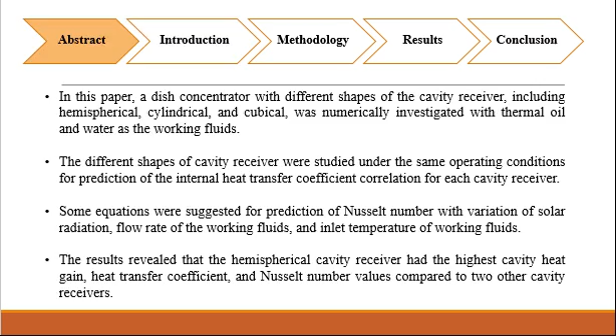Introduction. Some researchers investigated thermal models of solar dish concentrators with cavity receivers. Yan et al. investigated and optimized a new structure of dish concentrator. They presented equations for designing the novel dish structure with the highest performance. Soltani et al. investigated the optical and thermal performance of a dish concentrator with a new shape of cylindrical cavity receiver. They investigated different parameters for optimizing performance of the solar system.

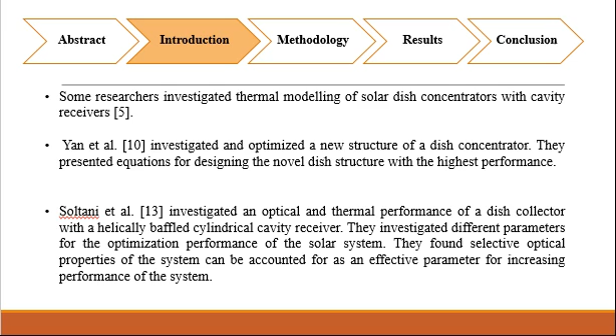They found selective optical properties of the system can be accounted for as an effective parameter for increasing performance of the system. On the other hand, some researchers studied convection heat transfer of the working fluid in solar systems. For example, some researchers studied convection heat transfer in microchannels based on laminar flows. Water and air were used as the working fluid. They presented some Nusselt number equations for the investigated system.

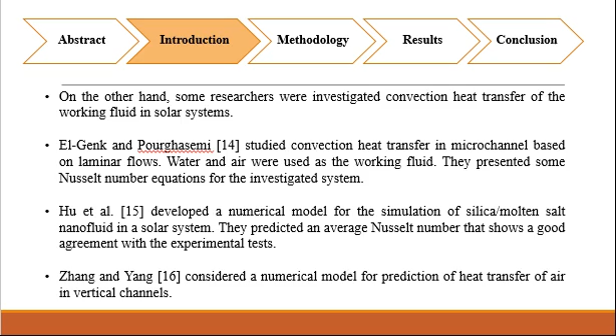Hu et al. developed a numerical model for the simulation of silica molten salt nanofluid in the solar system. They predicted an average Nusselt number that shows a good agreement with the experimental test. Zhang and Yang considered a numerical model for prediction of heat transfer of air in a vertical channel.

It could be seen from the literature review that there is no reported research related to the prediction of Nusselt number for different shapes of cavity receivers. Consequently, prediction of Nusselt number of the dish collector using different shapes of cavity receiver is a novel subject for research. In the current study, the influence of various parameters such as solar radiation, inlet temperature, and volume flow rate of the working fluid is investigated.

Three types of cavity receiver, including hemispherical, cubical, and cylindrical cavity receivers, are numerically simulated. Thermal oil and water are examined as the working fluid. The Nusselt number of different investigated shapes of cavity receiver using various working fluids is predicted based on the developed numerical model.

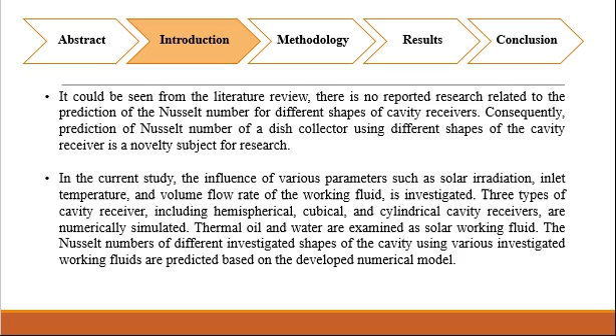Methodology. A schematic of the investigated solar system with different cavity receivers is presented in this figure. You can see here we have a dish collector with three shapes of cavity receiver, including cylindrical, cubical, and hemispherical cavity receivers.

The dish concentrator with tubular cavity receivers was used as a solar dish reflector. You can see here some optical and structural parameters of the solar system, including solar dish reflectivity of this amount, tracking error of 1 degree, optical error of 10 milliradians, and some other structural parameters for the dish concentrator and different shapes of cavity receiver. You can find more detail related to these parameters in the paper.

It should be mentioned that the modeling of this study was done based on 2 steps, optical modeling and then thermal modeling. In the first step, we present some detail related to optical modeling. The optical performance of the solar system was investigated by SolTrace software. Based on the developed optical analysis in SolTrace, the flux distribution along the cavity tubes and absorbed solar heat flux by the cavity walls were estimated. A view of the optical analysis of the dish concentrator with 3 investigated tubular cavity receivers is presented in this figure.

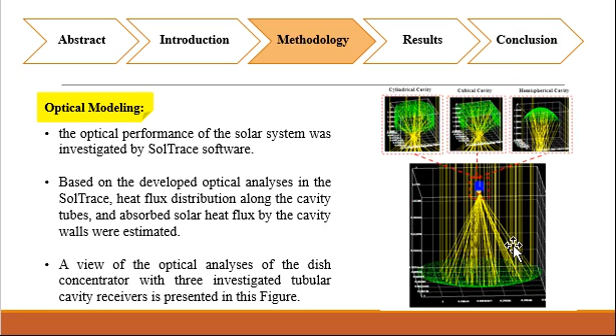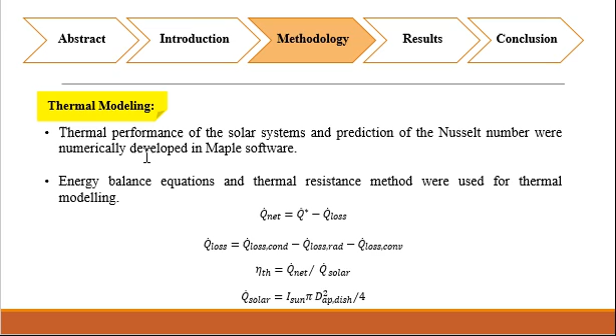Thermal modeling of this system was done based on energy balance equations and the thermal resistance method. You can see the general equation of this modeling here, and you can find more detail in the paper. The thermal performance of the solar system for prediction of Nusselt number was numerically developed in the Maple software by writing code.

Validation of the system was done based on experimental data that were measured and reported in reference 19 for the same dish collector with cylindrical cavity receiver, which you can see here, and there is a good agreement between the measured experimental data and calculated data at noon when the system is at steady state condition.

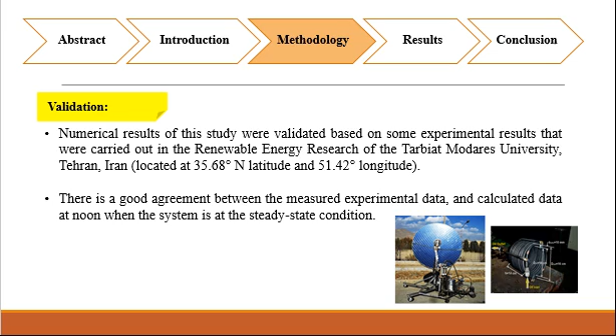Results and discussion. It should be mentioned that the analyses were done based on a comparison of 3 cavity receivers and a comparison of 2 different working fluids used in this study. In the first step, we present calculated results related to the comparison of 3 cavity receivers.

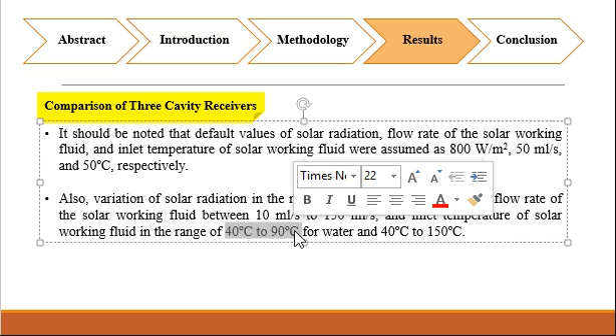It should be mentioned that the default values of the solar radiation, flow rate of the working fluid, and inlet temperature of the solar working fluid were assumed as these values that you can see here. Also, variation of the solar radiation was done in the range of these amounts, flow rates of the working fluids were investigated between these amounts, and inlet temperature of the working fluid was investigated in the range of these amounts, for oil and for water. You can see these values for water and these values for oil.

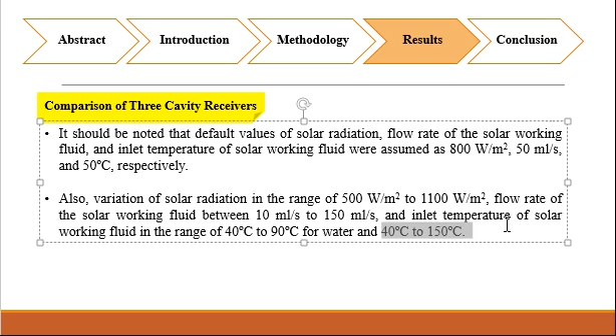Here you can see the result of the cavity heat gain for 3 different shapes of cavity receivers. It can be seen the hemisphere cavity receiver resulted in the highest cavity heat gain compared to other investigated cavities for all of the investigated conditions. It could be concluded that the cavity heat gain increased with increasing solar radiation, increasing flow rate, and decreasing inlet temperature of the working fluid.

Also, there is an optimum value for the flow rate of the working fluid, nearly 30 milliliters per second for the 3 investigated cavity receivers, that can save the required energy for pumping oil while achieving the highest thermal performance.

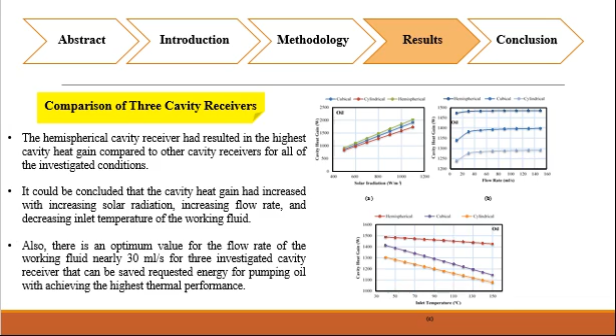Here you can see variation of heat transfer coefficient with variation of solar radiation, flow rate of the working fluid, and the temperature of the working fluid for different shapes of cavity receivers. The highest heat transfer coefficient was calculated for the hemisphere cavity receiver for all of the investigated conditions. Also, increasing solar radiation increased the heat transfer coefficient in a meaningful manner. On the other side, variation of flow rate and inlet temperature of the solar working fluid has not shown a significant difference in values of heat transfer coefficient.

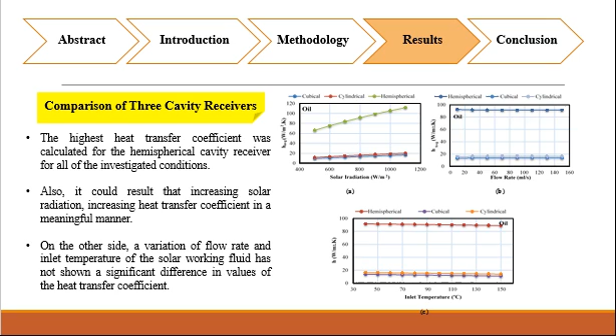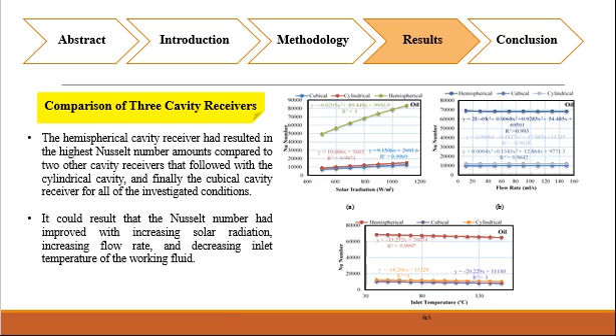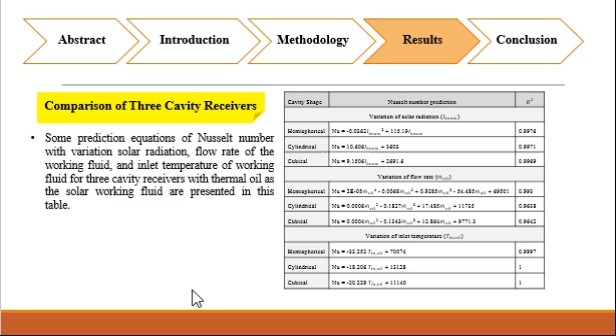Here you can find variation of Nusselt number amounts for variation of solar radiation, flow rate, and inlet temperature of the oil. You can find the hemisphere cavity resulted in the highest Nusselt number amounts compared to other investigated cavity receivers, followed by the cylinder cavity and finally the cubic cavity receiver for all the investigated conditions. Here you can find a predicted equation for Nusselt number in different conditions, and more details have been presented in the paper.

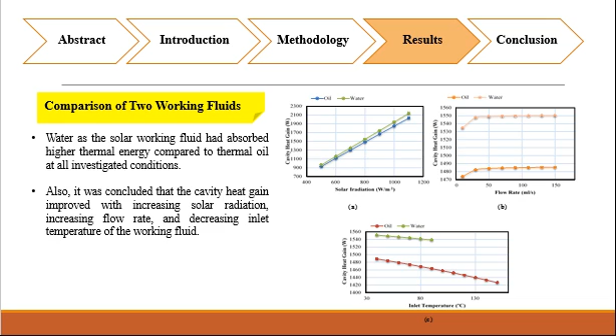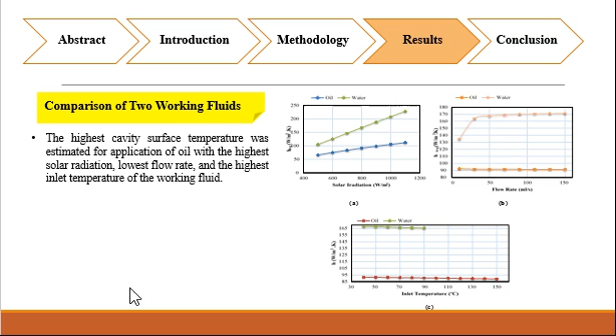As we mentioned, these analyses were done for 2 working fluids, water and oil, and you can see that water as a working fluid absorbed higher thermal energy compared to thermal oil. Also, the cavity heat gain improved with increasing solar radiation, increasing flow rate, and decreasing inlet temperature of the working fluid. The highest cavity surface temperature was estimated for oil with the highest solar radiation, lowest flow rate, and highest inlet temperature of the working fluid.

Also, the application of water as the solar working fluid resulted in higher values of the heat transfer coefficient compared to oil. The heat transfer coefficient improved with increasing solar radiation, increasing flow rate, and decreasing the temperature of the solar working fluid.

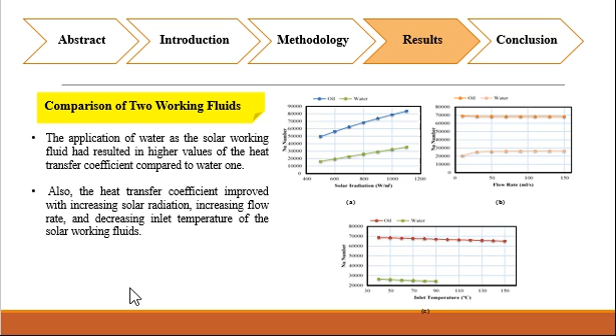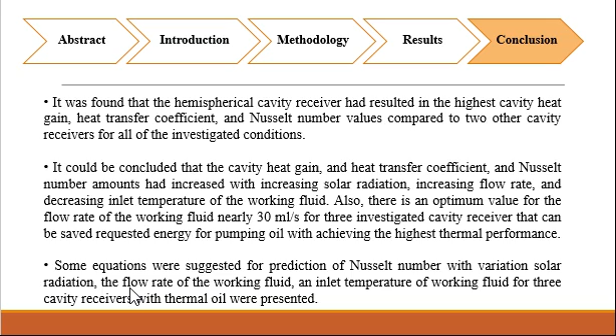Finally, it was found that the hemisphere cavity receiver resulted in the highest cavity heat gain, heat transfer coefficient, and Nusselt number values compared to other investigated cavity receivers for all of the investigated conditions. Cavity heat gain, heat transfer coefficient, and Nusselt number increased with increasing solar radiation, increasing flow rate, and decreasing inlet temperature of the working fluid. Some equations were suggested for prediction of Nusselt number with variation of solar radiation, flow rate, and inlet temperature of the working fluid for 3 investigated cavity receivers with thermal oil.

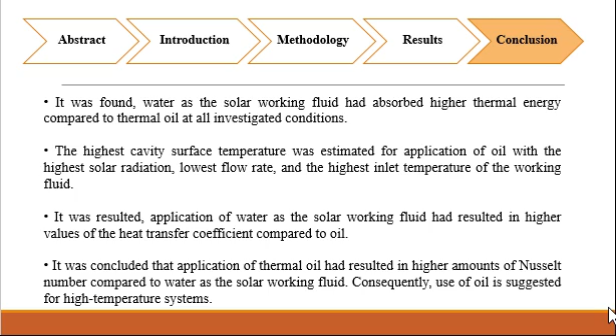Also, water as a working fluid absorbed higher thermal energy compared to thermal oil at all investigated conditions. The highest cavity surface temperature was estimated for oil with the highest solar radiation, lowest flow rate, and highest inlet temperature of the working fluid. Water as the solar working fluid resulted in higher values of the heat transfer coefficient compared to oil. Thermal oil resulted in a higher Nusselt number compared to water. Consequently, use of oil is suggested for high temperature systems.